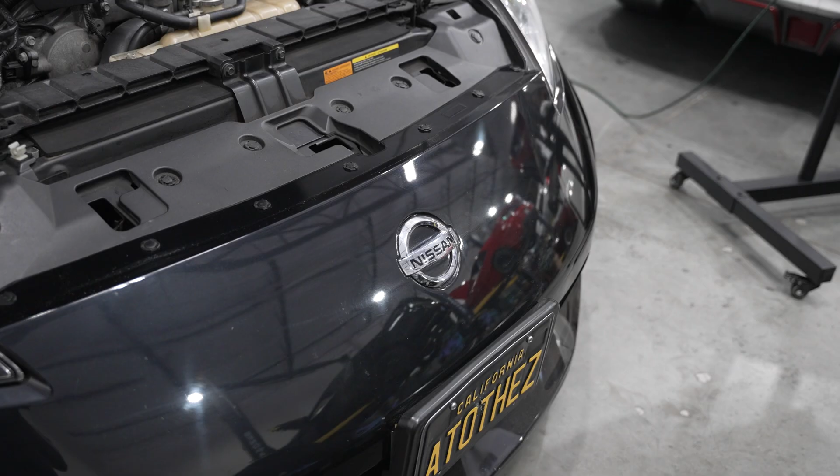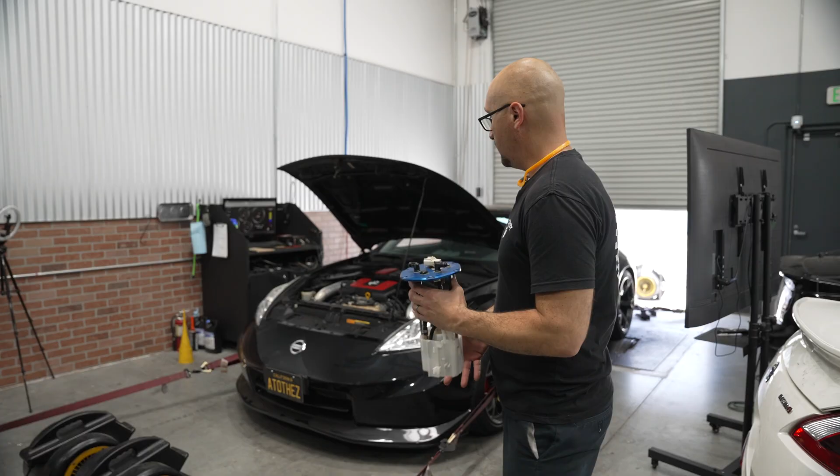All right, guys, so for today, we ended up replacing the entire fuel pump assembly on this already twin turbo 370Z. And as you can tell, what I have in my hands here is a very early version, probably version 1 of the CJM billet hat. So this setup's been on here for quite some time, and the fuel pump failed.

It has a Walbro in there, probably the 450. I'm not sure if it's the 274 or the 285 part number, but essentially it just cut out, it died. It would work intermittently here and there. And what we found was something we've seen in the past: the wiring, particularly on the ground side, gets way too hot and damaged.

So we've done a few steps. We're actually now running overkill gauge wiring on the inside. There's not much we can do on the actual connector side of the fuel pump. That's all essentially 14 gauge wire, but everything else we've done either 12 or 10 gauge wiring, and making sure we have a really good ground for all this stuff.

But you can kind of see here, I'll pull this connector off and you'll see how hot this thing got. So there's the wiring side. It's melted the sheathing, the insulation right off the wire. And if you look on the inside of the connector, you can see how hot that pin got. It just about charred it and started to melt it almost.

So again, there's a few things we're gonna do to help prevent this. Using that 285 Walbro fuel pump does produce a little bit more heat. And if you're also using the Hellcat version, it doesn't have a check valve in it, so you're gonna be creating a little bit more heat because they definitely draw more amperage.

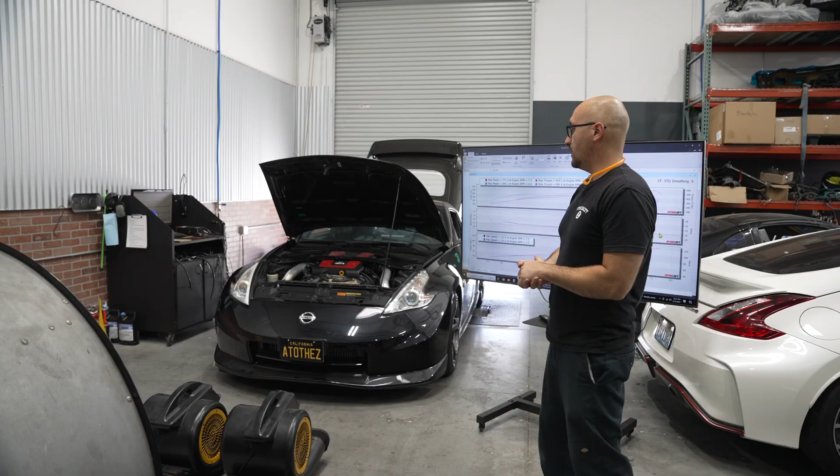All right, so we made a few pulls. You'll hear the very first pull we did on a low boost, this thing was slipping pretty good. So today, unfortunately, I ran out of the VHT. It's what they use at the drag strips to prep the surfaces. My dyno roller is super old. It's a 2007 model year Dynojet 224. And yeah, the knurling on that thing's seen better days.

So if I don't have my VHT prep on there, that thing will just spin. So I had to throw a couple of bodies in there for now. I gotta go get a little bit of belt dressing until the VHT stuff comes in. But nonetheless, we got some good data and we were able to do what we needed to as far as redoing the calibration slightly.

So at the top, you'll notice that it actually richened up. Nothing too crazy, but enough to warrant making a change and addressing it. And the other thing, because of our dyno situation, you're gonna notice that it's not making as much power. I've plotted vehicle speed versus engine RPM, because that's how you can tell you're getting slip when you're saying, hey, why is the car not making power? Sometimes you can't even detect a little bit of slip, and it can dramatically change the numbers.

But nonetheless, we got good AFR data. We're gonna compare it against the very last pass we did on the same map, no changes, and let's do that now. All right, so this is from about a year ago when we were just doing a little checkup on the car. And on our second graph, we have our AFRs, and this is where you begin to notice a difference.

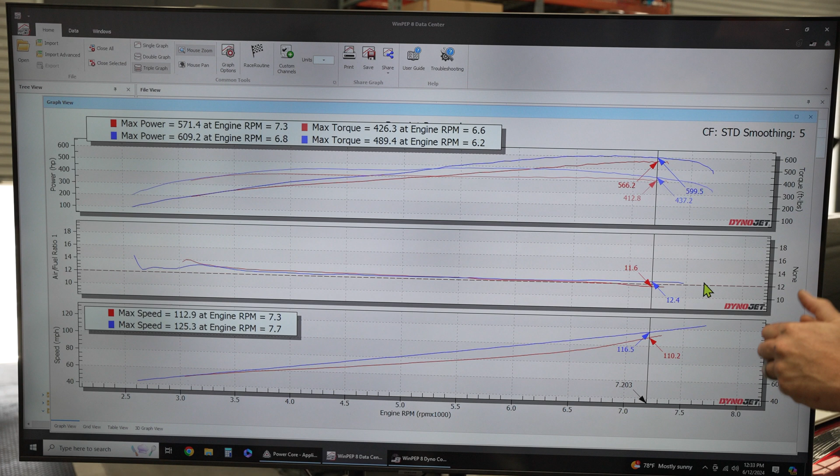So blue is before, red is now, and you can see how we are richer with our second pump, and blue, it was a little leaner. So back then with about 7,200 RPM, we were at 12.4 and 11.6. So these numbers are pretty good, but what we've done is we're gonna go ahead and just lean it out a little bit, typically target like a low 12 AFR on E85.

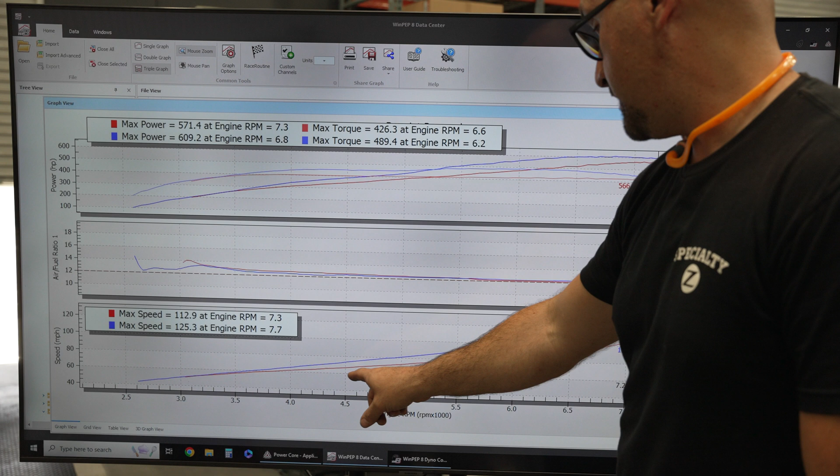And the bottom graph is depicting the vehicle speed versus engine speed. So speed of the vehicle, what we're actually doing, and our engine RPM. So what you'll see is a big gap difference between blue and red run. I've spoken about this in another video we've done, but this is how you can actually measure to see if you're getting slip. So even with two bodies in the back of this thing, you're gonna see we still have quite dramatic slip going on, and you'll see how it has a good little valley here, and then it kind of comes back up and starts to hook up.

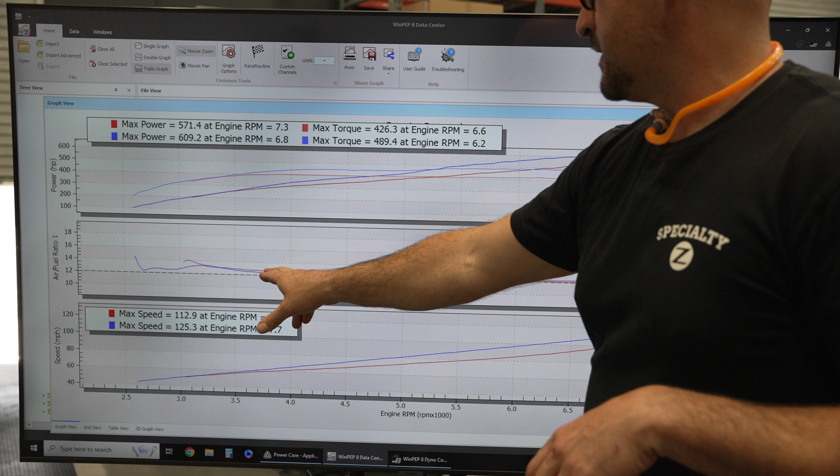So this unfortunately isn't giving us a good indicator of what it's making currently for power. And you want to be careful adjusting your AFRs too much when you're not getting full load, because the engine's not getting loaded entirely. Your boost pressure can change, your AFRs can also change. So we're gonna leave essentially this stuff here. You'll notice it's a little bit leaner here, and it's probably because it's not being loaded as much. So because the engine is not seeing that load from slipping, we're basically not getting a good indicator there. So you can tell that this definitely richened up way up because of that as well.

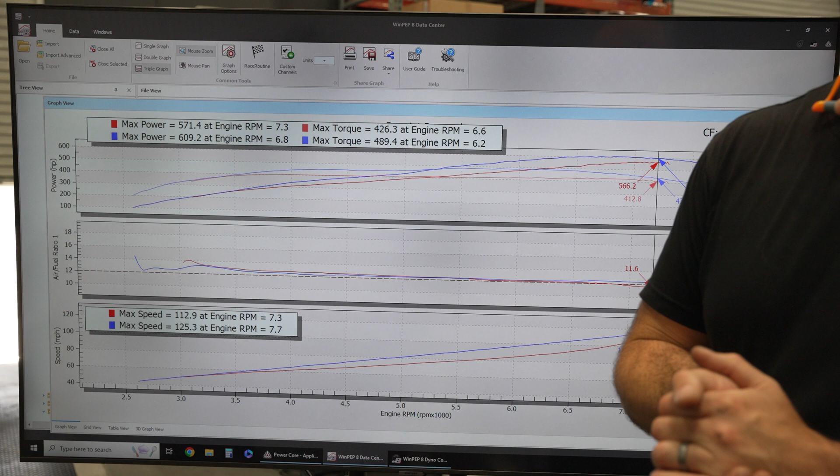So we'll go ahead and we'll get our dressing on there and just double check everything again. Anytime you're doing anything with your fuel system and you're changing anything like that, it's a good idea to always double check the state of the tune. So in this case, job accomplished. We are ready to get this thing back on the road.

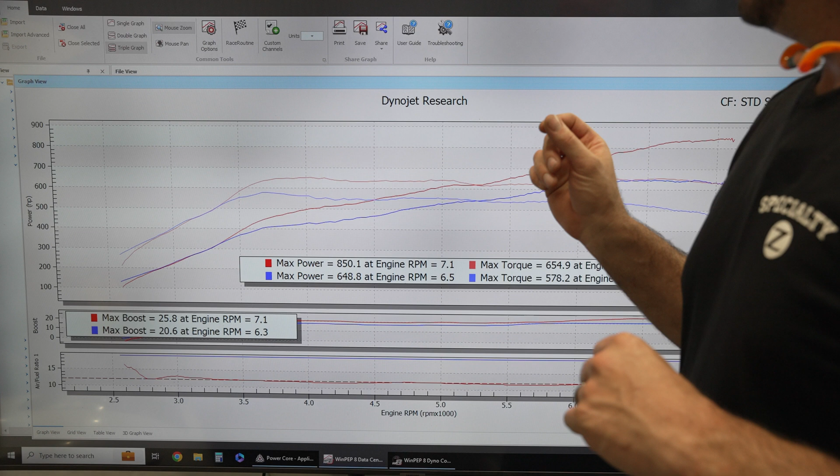And the beautiful thing, again, if you're running just straight 91 octane, you're going to be making the power you would be on stock turbos on E85. So that's really cool with the upgraded turbos. On 91, you're making what you were with E85 on stock turbochargers. And our power band just keeps going and climbing.

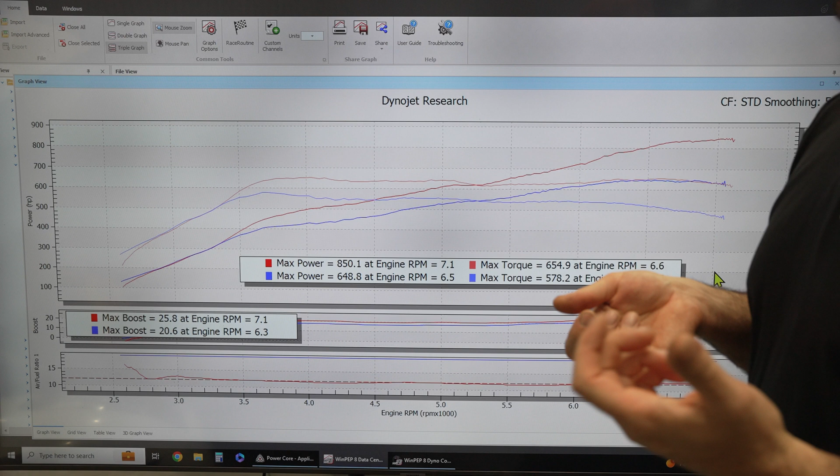So that's the beautiful thing about these turbos. Perfect turbos for a street car. Even the Xona Rotors that we did, great match. The AMS Alphas, the 9s, really great turbo setup as well.

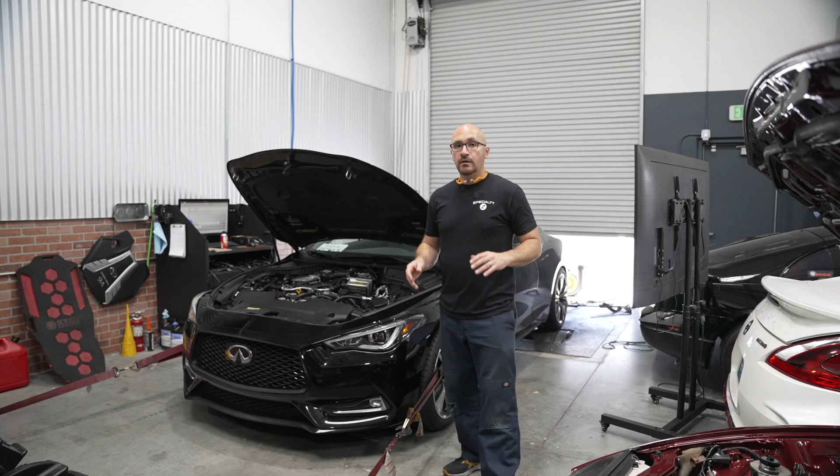All right, guys, on today's episode of the VR30, we've got a 2018 Q60, just about to hit 103,000 miles on this bad boy. Essentially what it came in for is walnut blasting of the intake valves, because they get gunked up, especially with this amount of miles. So we got those cleaned up, added an AMS heat exchanger, and all we did was put an EcuTech tune on it, calibrated it on the dyno, and it's amazing what the tune can do for these things.

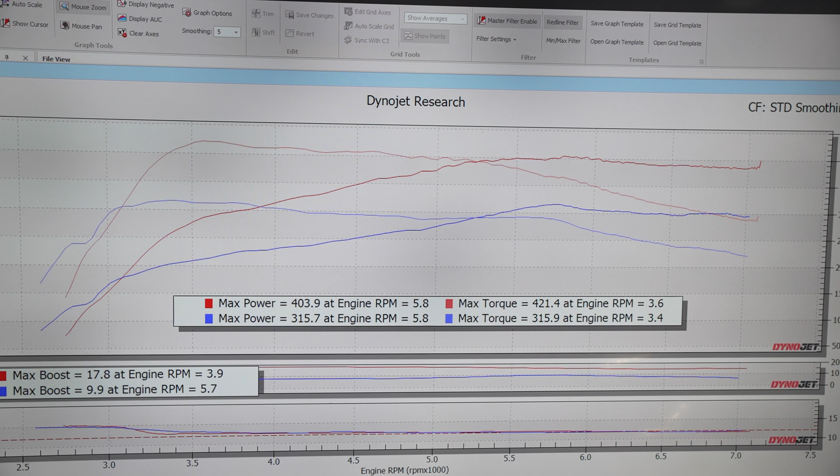Baseline 315 wheel, really healthy motor for 103,000 miles, and we picked up basically 90 wheel peak. So we're just over 403 wheel on this bad boy. So it did really good, and keeping it simple, you still get really good results with this platform.

All right, guys, we are back with Peter's 370Z. This time, Peter sourced a brand new cog setup from Alex out of Taiwan. A really nice setup. I know Alex has done a few really nice innovative things with the supercharger belt and pulley system on these cars. And thankfully, we did about 8 passes on this thing, and the belt has survived.

So we did a little tweak. We tightened it up a little bit more based on Alex's recommendation, and used a belt supplied by Alex. And so far, it looks pretty good. It does walk around a little bit, but you could barely even get a pass or two on the last cog setup we were testing with Peter.

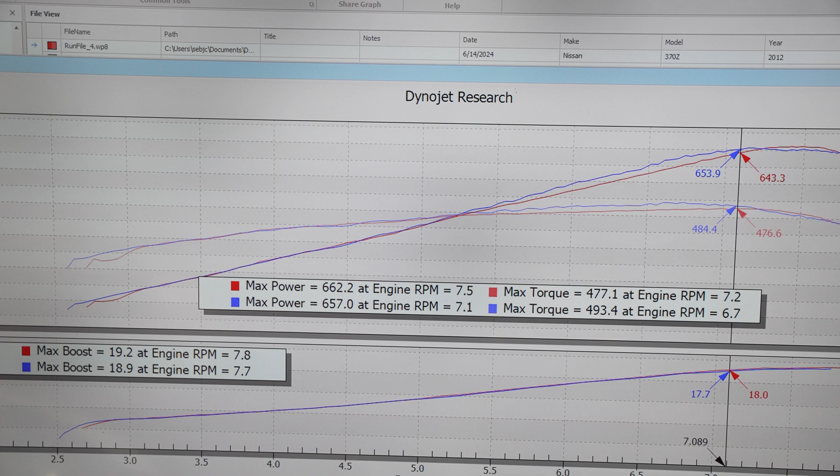But nonetheless, really good power, 18, 19 pounds of boost. That's a lot of boost for that power. But with these supercharged setups and this SI wheel, it takes that much to do that power. So it's really making a lot more. These supercharged engines really eat up a lot more power than what they're actually able to put out. So until next time.

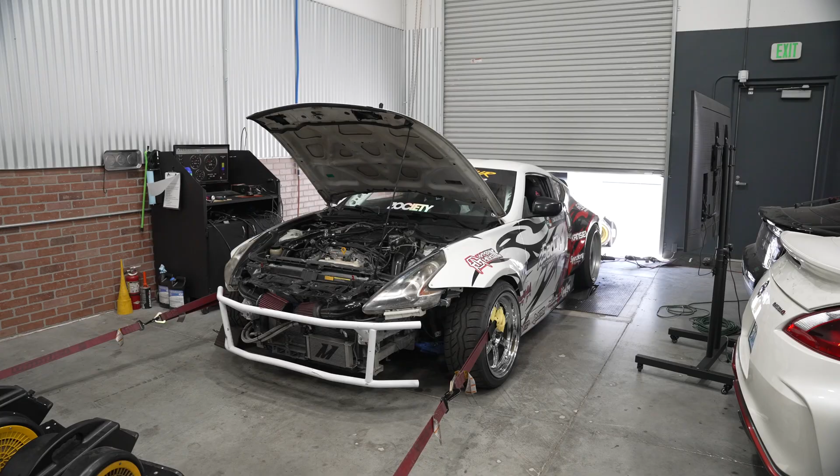Okay guys, for today, we've got Zach's 2009 370Z drift car, and Zach's got it set up on some nitrous. So we got it in, did our EcuTech calibration for straight 91 octane without any nitrous. You've got to make sure that is all dialed in really, really well. And once we made sure we had a really good base tune for that, we went ahead and turned on our nitrous system.

This one's using a Nitrous Express kit in conjunction with the NOS controller, which is really badass. It's a little small LCD screen type thing, and you can basically select how you want the nitrous to kick in. It also gives you a readout of your engine speed, and it's just another way to make sure that you have your nitrous working exactly the way you need it to.

Nitrous is fantastic, a great way to add power, but with that, you need to make sure it's being controlled and used as intended. What I mean by that is you don't want to just throw it in, turn your bottle on, and run the system. You've got to make sure your bottle pressure is where it needs to be.

You want to make sure you have a way to purge the system so you have fresh nitrous right up against the solenoids, so it gets immediate nitrous to the nozzles, which of course goes straight into the engine. So we started off with a 50 shot to get our feet wet. The kit worked exactly as it needed to. We made tunes for the 50 shot to make sure we had the proper AFR and ignition timing.

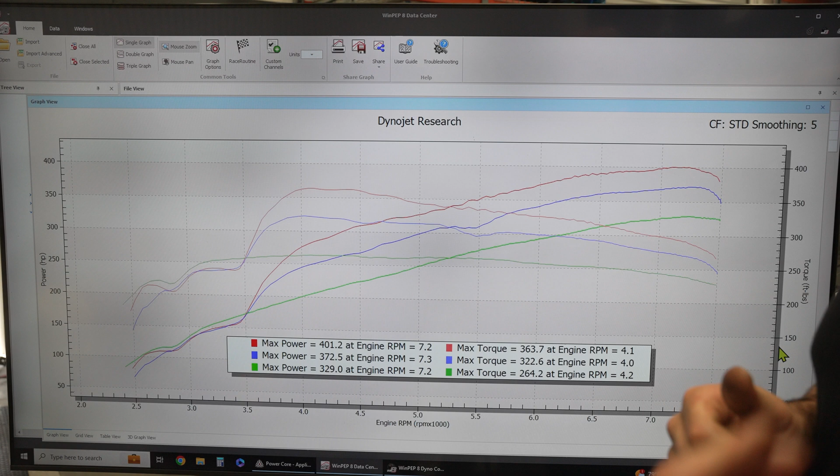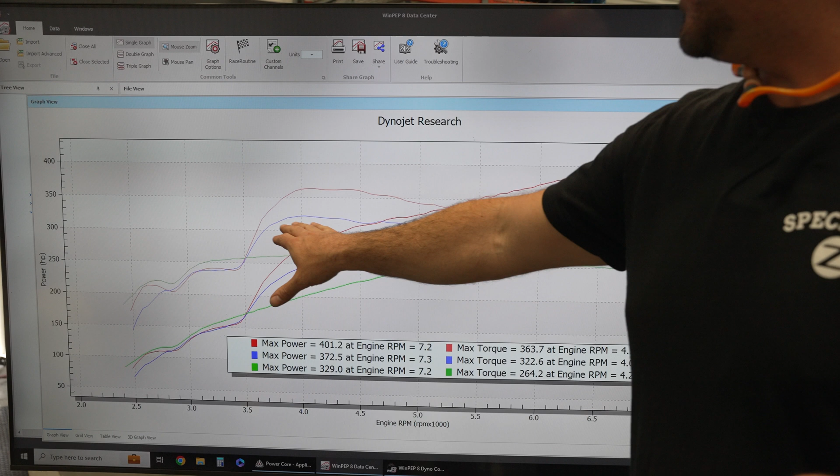It could be catastrophic. And finally, our 70 horsepower shot in red, and you can see everything's really happy. It's typically what we see with a 70 horsepower shot, and it's really good. So 401 and 363 foot-pounds of torque. We have it progressively coming in at 50%. We're not giving it 100% beans right away, but this is perfect, exactly what you need to get those tires lit up for drifting.